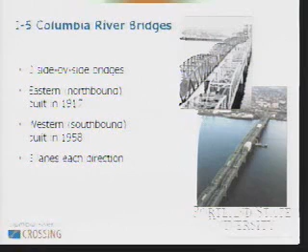And the western or southbound bridge was completed in 1958. The existing northbound bridge at that point was then reconstructed to raise the profile a little bit to match the new southbound bridge. And tolls went on in 1960, and they were taken off again in 1966. The tolls at that time were 20 cents for a vehicle and up to 60 cents for a truck. 3 lanes in each direction now.

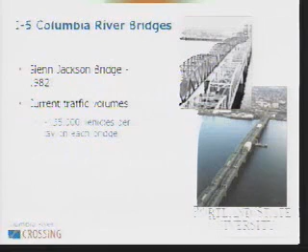The next major crossing of the river was the Glenn Jackson Bridge, completed in 1982. You start to see a pattern that about every 30 years or so, there's been the need to push for another major investment in river crossing capacity. We're on that 30-year mark now. We're looking at trying to have the improvements to I-5 under construction by the year 2012, so it's almost exactly on that 30-year cycle. Current traffic volumes are roughly 135,000 vehicles on each bridge. By 2020, which is our current forecast, the I-5 bridges are projected to be carrying about 180,000 vehicles per day.

Over the years, there have been a number of studies. In fact, starting shortly after the Glenn Jackson Bridge was completed, a number of studies have identified the need to do something to improve I-5. The most recent one and the most comprehensive was the I-5 Transportation and Trade Partnership Strategic Plan, which was completed in 2002. It had wide-ranging recommendations, from demand management techniques that the region ought to be incorporating to a bunch of other things, but relative to the project, there were four specific recommendations.

One was that we ought to be providing for high-capacity transit between Portland and Clark County. In particular, that study recommended that it should be light rail, and I'll come back to that in a bit. They also recommended 3 specific highway improvements to I-5.

The first was to widen 99th Street to I-205 to 3 lanes in each direction. WashDOT has moved forward with that, and it'll be completed probably at the end of this year. The second project was to improve the Delta Park section of I-5, which, as you know, drops from 3 lanes to 2 southbound and northbound. Right now there are 3 lanes, but there are no shoulders in that section. That one, ODOT is just now completing the environmental assessment, and they anticipate the construction will start in 2008.

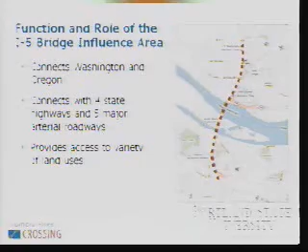Function and role. I-5 is not up here, but I-5 is the only through interstate route between Canada and Mexico on the west coast. That's a critical function for freight movement. Obviously, it connects Washington and Oregon. In this 5-mile section that's shown here in the dashed line, there are, as I mentioned, a total of 8 interchanges. That includes connections with 4 state highways as well as 5 major arterial roadways.

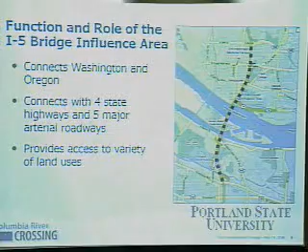It provides access to a variety of land uses. You've got the city center for downtown Vancouver. You've got a regional shopping center on Hayden Island and residential activity there. Of course, your industrial properties in the Columbia Corridor for the Port of Portland, as well as other major shippers in that area. And the result of that is that you see some very interesting travel patterns.

We did last fall a license plate video detection survey that captured all the vehicles entering and exiting on every entry and exit point in that 5-mile section of freeway. One of the things that came out was some pretty dramatic information about how people are using the bridge.

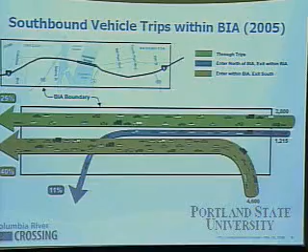Of the morning southbound trips in the AM peak, about 25% of those trips are entering the bridge influence area, I'll probably use BIA as an acronym, from north of SR 500 and proceeding through to south of Columbia Boulevard on I-5. So 1/4 are through trips as we define them for the project area. About 11% are trips that come in from the north and then get off in Oregon, but short of going through to Columbia Boulevard. About 40% are trips that enter primarily on SR 500 and SR 14 and head south. So that's your major commuter flow.

And then finally, there's about 1/4 of all trips that actually get on within that 2-mile stretch north of the freeway and then get off before you get to Columbia Boulevard. So of the traffic that's crossing the river in the morning, only about 1/4 of it is actually extending through the whole length of the corridor.

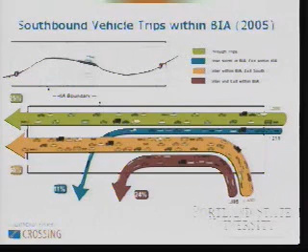We have the similar pattern northbound. I won't go through all the numbers, but the result is very similar. You see that it's about 1/3 or 32% of the trips that are actually going all the way through, and nearly 40%, 38% are getting on and off.

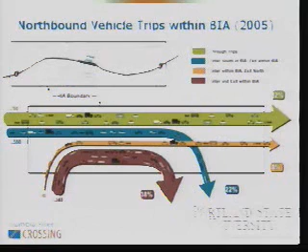An important point to note is while a good substantial number of the trips are getting on and off in that short segment of freeway, that doesn't mean that they're short trips. From the modeling work that was done in 2002, the average trip distance for the trips crossing the river was about 16 miles. So what it means is that with only 2 bridges connecting the Vancouver and Portland metropolitan areas, there's a lot of people that are traveling substantial distances in order to cross the river.

Let's talk about the need for the project, and it's broken into several categories. These are all taken directly from the formal purpose and need. Most of you, I'm sure, are aware that under the National Environmental Policy Act, one of the first things you have to identify is a formal purpose and need for the project. It was adopted early this year, and it had several categories.

The first being, no great surprise here, that travel demand exceeds capacity. And it exceeds it for a number of hours per day, which I'll show you some graphics of in a little bit. Transit service has no alternative but to put up with the same congestion that all the other travel modes across the river do as well. We have impaired mobility for freight traffic, not only traveling through the area, but in access to the Port of Vancouver, Port of Portland, and other major freight centers. I'll talk a little bit more about crash rates.

They're too high. They're significantly higher than averages. If you've ever tried to cross the bridge as a pedestrian or a bicyclist, you know that the facilities are poor and access to them is very inadequate.

And finally, both Oregon and Washington have defined I-5 as a lifeline corridor, which means that they want it to essentially be operable soon after an earthquake or a major disaster takes place. These are old bridges. As I said, the newest one was built in 1958, and they were not designed to meet modern seismic standards. So part of our problem definition is identifying that and looking for alternatives to address it.

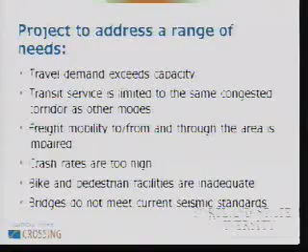So, pretty basic. Travel demand exceeds capacity. I'm not going to spend a lot of time there because I'm going to show you some graphics of that. Here's a plot of the northbound volumes, which would be the PM 1-hour volume. This is from midnight to midnight. Northbound volumes. Okay, here we go.

You can see that the demand in the blue line here gets up to about 6,000 vehicles in the afternoon. This gray bar that is illustrated here is approximately what we're finding by empirical evidence is the maximum that you can get across the bridge. A typical lane capacity would be more than 2,000 vehicles per hour per lane. But what we're finding, because of the configuration of the bridge with the ramps immediately north and south in both directions, is that the actual capacity that you can get across the bridge is somewhere around 5,400 vehicles. So you can see that the demand that we calculated or observed from that license plate survey actually exceeds what you can physically get across the bridge.

What does that mean? It means that there's a time shift for some of the travel that's trying to use the bridge. Folks are entering it and they're getting caught in queues on the ramps, getting caught on the south end of the bridge in this case, and they're having to wait in order to pass across the bridge. What that results in is right now, on average, we're seeing about a 4-hour congestion period every single day in the northbound.

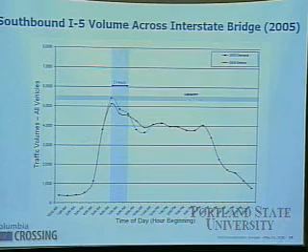Quickly looking at the southbound one, you see the same pattern. Some diversion, but mostly at this point it's still just a matter of backing it up. We're about 2 hours on average in the morning when you see delays and backups that frequently occur for a mile or two or more south of the bridge or north of the bridge.

Now, if you look at the forecast for 2020, we again show the blue line as the projected volumes, which get closer to 7,000 vehicles. With the same capacity on the system, you can see that there's a substantial curtailing of that peak because you simply can't get more traffic across the river. That means that you're going to see some time shifting, both to earlier periods in the afternoon and later periods in the afternoon. And what that results in is what we're estimating is somewhere around a 9 to 10 hour period of congestion every day, with the afternoon rush hour starting about 11 o'clock in the morning.

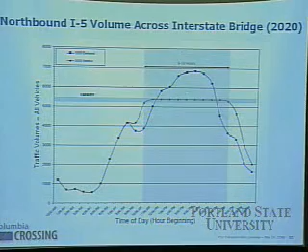Yes, sir. Is the problem, you say, that the bridges aren't wide? Is it the congestion before the bridges, or if it didn't have congestion before the bridges, would the 3 lanes of the bridge give you more capacity?

The question is, is it the bridge that's the problem, or is it the congestion somewhere else in the system? Right now, southbound, the single largest issue is the Delta Park section where it drops to 2 lanes. With the addition of the 3rd lane on that part of it, the bridge will become the most significant bottleneck. Northbound, it is the bridge, in fact, that's frequently causing queuing all the way back to I-405 and even down to I-84 and further south.

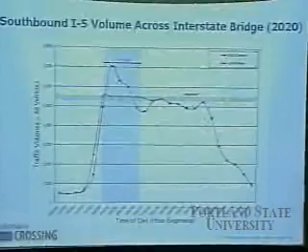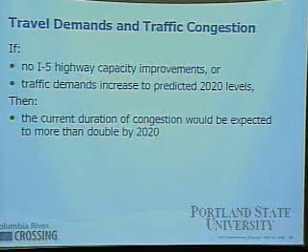And the same thing in the morning. If you look at the year 2020, our 2 hours is projected to go to 4.5 hours. So you're now up to 13 or 14 hours of congestion per day. And just a brief summary of that, if we don't do anything to the highway system and travel demands continue to increase as we're forecasting them, then our 6 hours plus per day now is going to go to 13 or 14 hours by the time we get to 2020.

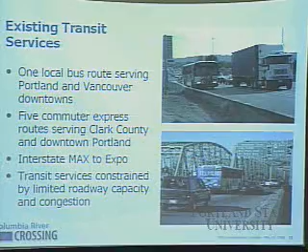Let's talk a little bit about existing transit service. We have a combination of local bus service provided by TriMet, which has route number 6, which goes over to the Vancouver Transit Center in downtown Vancouver, and then 5 commuter express routes serving Clark County and linking them to downtown Portland. Of course, just south of the river at the Expo Center, we have the northern terminus for the Yellow Line, Interstate MAX. Getting across the river, as I mentioned earlier, right now there's no way to do that as a transit rider other than to put up with the same congestion that everyone else is dealing with.

One of the results of that as you look to the future is, this again comes from the partnership study that I mentioned, which was completed in 2002, that the travel times from downtown Vancouver to downtown Portland, and this is PM peak hour, I believe, will go from about 27 minutes on average to over 55.

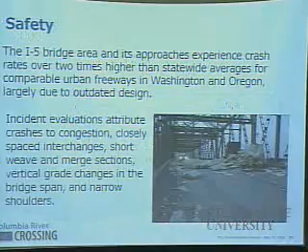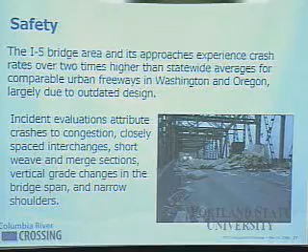There's a number of issues dealing with safety. We have looked at statistical analysis for the safety data for 2000 through 2004, compiled by both Washington DOT and the Oregon DOT. And I'll get into some of the statistics, but essentially we've been able to identify that the safety issues are significant, that they're caused by congestion, by the close proximity of the interchanges. I'll just stop there for a second.

The minimum federal standard for urban area interchanges is about 1 mile, and they prefer 2 miles between interchanges on an interstate system. With 8 interchanges in that 5-mile section, and if you take out the bridge from that, the average spacing between the interchanges is less than 1/2 mile apart. So the weaving issues and the short ramps, the accel lanes and decel lanes are a significant issue in the corridor, and you see that in the accident history.

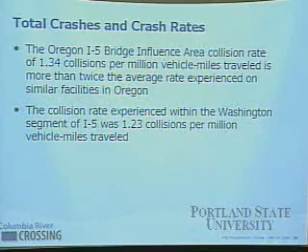By analysis, the 5-year period that we looked at in Oregon, 1.34 collisions per million vehicle miles is twice the average for comparable urban freeways in Oregon, so that would be looking at the rest of I-5 south of the bridge influence area and I-84 and, of course, the Sunset Highway and 217. The collision rate in Washington is similar. It's about 1.23 collisions per million vehicle miles. Interestingly, Washington doesn't have that same sort of normative standard that we can compare and say whether it's higher or lower than their standard.

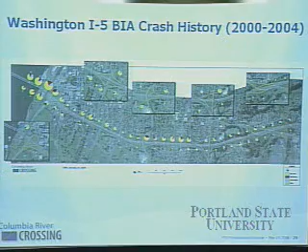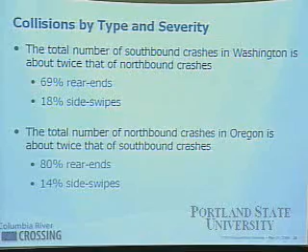So this just summarizes a little bit about what I said. Most of the accidents are rear ends. You can see that by the scatter diagrams. The next most common type is side swipes, and that occurs for both Oregon and Washington. And note that as you approach the bridge in both directions.

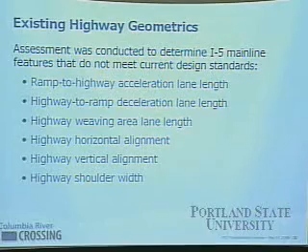Another thing that we did was to try to correlate the location of the accidents with the substandard design features. And I was corrected. I shouldn't say substandard. I should say design features that no longer meet current standards, because they were designed, of course, to standard in 1917 or 1958 when they were built. So a number of different types of geometric issues that we looked at: the ramp-to-highway acceleration and highway-to-ramp deceleration, weaving areas, horizontal and vertical alignment, and shoulder widths.

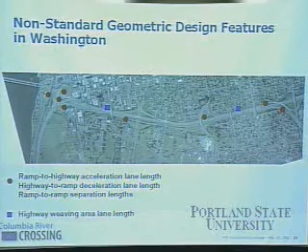And just a graphic illustrating, again, the Washington side, the acceleration length where it does not meet, and deceleration where it doesn't meet standards, the weaving area issues where they do not meet standards, and horizontal alignment issues occurring mainly at the bridge, on the bridgehead on the Washington side. And finally, areas where we have substandard shoulders.

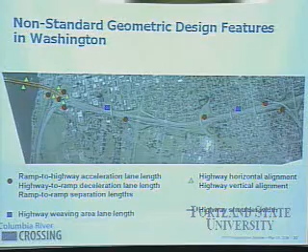And on the Washington side, it's almost exclusively related to the bridge structures. On the Oregon side, the same kind of information. The accel and decel issues show up here. Weaving areas occur in several locations. Horizontal alignments and vertical alignment issues.

One of the more challenging facts of life is that when they rebuilt the bridges in the late 50s and early 60s, in order to try to minimize the number of bridge lifts, they created a hump or a high spot in the bridges that are further south from the lift span to allow for most of the marine tug and barge operators to go through.

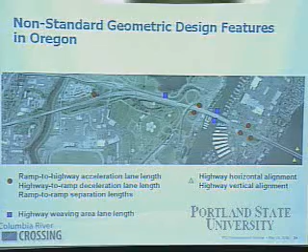In doing that, they decreased the speed profile for the hump and actually brought it down to a stopping sight distance of about 35 miles an hour on the bridge. So fortunately, most of the time the bridge is congested and people are traveling that speed. So just carrying this on, there are virtually no segments on the Oregon side where we have standard shoulders.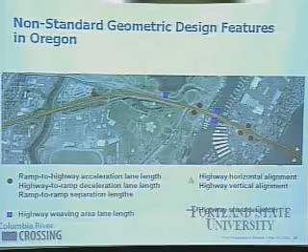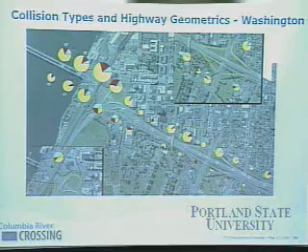Now the next thing you do is take a look at how that correlates with the accident history, and I won't dwell on that, but here's the picture of the Washington side again, and then you overlay that, and you see there's pretty much a one-to-one where you start to see the design deficiencies, and the same thing on the Oregon side.

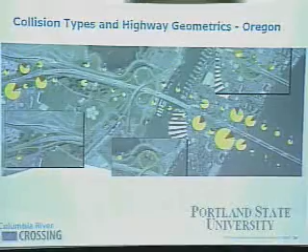Another thing that we identified in looking at the accident histories was we did a correlation between the time of day of the accidents, both northbound and southbound, and the bridge lifts themselves. So we got the bridge tender logs and actually identified particular days and particular times that bridges were lifted, and then correlated that with the accident histories before and after.

And what we found was a very striking correlation that there's about a 3 times higher likelihood of an accident northbound immediately following a bridge lift. What does that mean? It means that people are having to stop and are not paying attention, and they're rear-ending. And the same thing, but even more extreme on the southbound side, 4 times more likelihood of an accident after bridge lift on the Washington side.

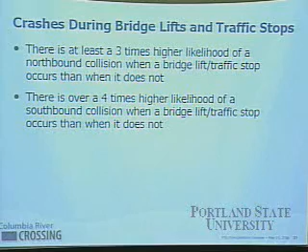Why the difference? We think the difference is that there's actually an S curve approaching the bridge on the Washington side as you're heading southbound, so you don't have the same horizontal sight distances that you do northbound on the bridge.

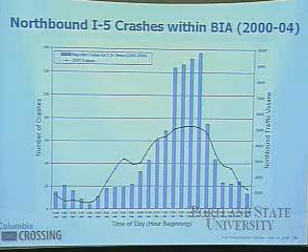Finally, there's a strong correlation on the safety data between the time of day and accidents and congestion. Here's our travel volume plot, again, midnight to midnight, and northbound showing the frequency of crashes by hour sector. So you see that the pattern pretty generally follows, but then your frequency of accidents just about doubles relative to the change in traffic volume. So most of your accidents are happening in the congested period of the day.

And if you do some statistical forecasting and look that out to 2020, you can see that you'd have a much larger period of the day with a much higher rate of accidents occurring if we don't do anything to fix the bridges.

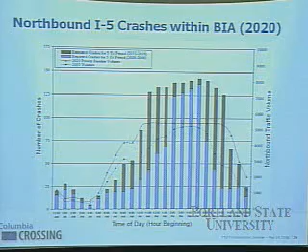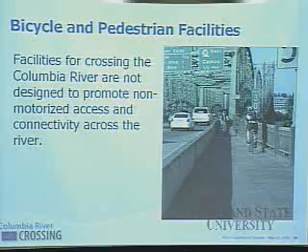Next topic that we identified as a problem, the existing bridges have sidewalks on both outsides of the bridges. However, they range in width between 3 and 6 feet, and they're only separated from the travel lanes by just the Jersey barrier and another foot or two of clearance. So it's not a desirable or pleasant experience, and it's far substandard in terms of meeting width standards. That 3 to 6 compares with what we're looking at in terms of desirable for both ODOT and WSDOT standards of about 14 feet.

Finally, I mentioned the seismic issues. We're currently doing a study to look at whether the bridges can even be upgraded to meet current seismic standards. It's far from certain that that's even a potential, which is going to have implications for the study because we have identified fixing that problem as a major part of what we're trying to address.

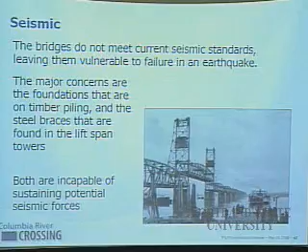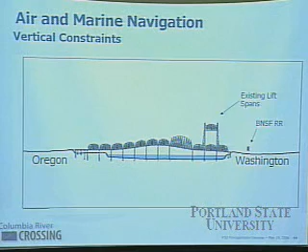One of the issues that we have to address is that immediately east of the I-5 corridor, they have a general aviation air park in Vancouver. It's Pearson Air Park. It's a historic facility. It's the only general aviation air park, I believe, that's operating in Clark County right now. We have been told in pretty certain terms that we can't think about relocating it and that we have to

work around it. So what we have as a constraint is that we have to stay under the approach slope for the approaching and departing planes as they cross over the top of I-5. You'll notice that the existing towers are in that approach slope, and when we talked to FAA about can we grandfather this in, they said no, the towers actually existed before there was an FAA, so we don't get any points for that.

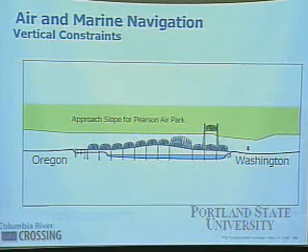The next challenge that we're trying to address is that right now there's the 2 lift spans. Each bridge has a lift span. It's on the North Shore, as I mentioned. We would love to find a way to build a bridge that doesn't have a lift span. In order to do that, you've got to be approximately in the range of about 100 feet, 110 feet off of the water. If you do that, you can see what happens. We are down to a very, very teeny window where we can actually try to snake a bridge through.

And we're working with both the Coast Guard and Federal Aviation Administration to see if we can't get a little wiggle room in those green and yellow zones. But the good news is if it was only one federal agency and they didn't have the other constraint facing them, they probably wouldn't be very flexible. But what we're hearing from both the Coast Guard and the Federal Aviation Administration is they recognize how tight this is and they're trying to work with us.

So then you overlay some profiles of potential bridge alignments on there. The lower one is about what we would do for a low-span movable bridge. It would still be higher than the existing bridges, would lift less often, but we would still require a movable span because, as you can see, we're not above the green zone for marine traffic. Note that on the north end, even the low alignment would take you over the top of the railroad. So now the touchdown point, or the way it's going to come down into Vancouver, is going to change significantly.

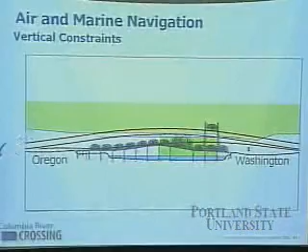Finally, this top line is one that we started off the conversation with the Federal Aviation Administration, or no, excuse me, the Coast Guard, because they said, well, we've got the Glenn Jackson Bridge upstream. It has about 144 feet off the water. Why don't you at least consider that? That way we know that we wouldn't be constraining the marine users any more than they're already constrained.

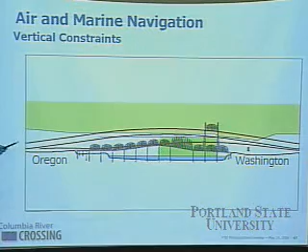They have since, based on a marine traffic survey, agreed with us that that would be extreme and that we don't need to go to that height because virtually none of the river users are using vessels that would require that kind of elevation. Plus, with the intrusion into the airspace for Pearson Air Park, we have essentially removed this high alignment from consideration.

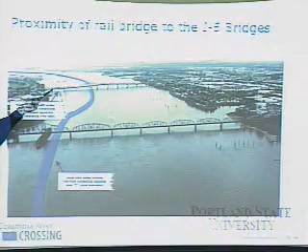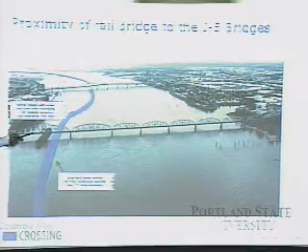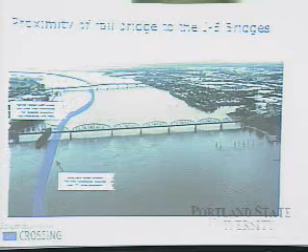Another challenge for us is that the highway bridges here, this is again the Vancouver shore and Hayden Island on the other side, are separated by only about a mile from the Burlington Northern Bridge, which is downstream. It also has its opening on the North Shore. And as I mentioned, when the bridges were rebuilt in the late 50s and early 60s and the hump was created, that was intended so that most of the commercial traffic could use that center span. What it forces them to do, though, is to make a kind of an S-curve as they go through this.

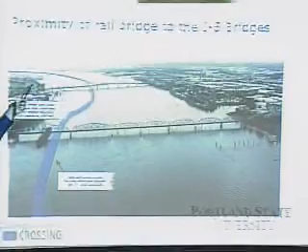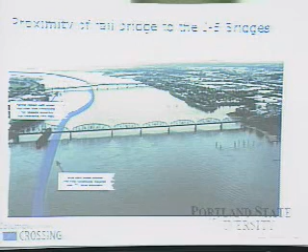And in times of high water or rapid flow, the tug operators will choose not to try to use that or even can't use it if the water is high enough, and instead will wait for an opportunity to pass through the lift span. And the reason I said wait is that by agreement with the Coast Guard, traditionally bridges have to respond to a call for clearance 24 hours a day.

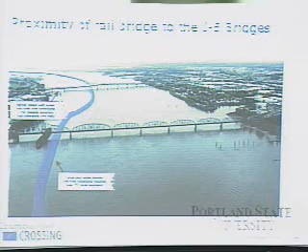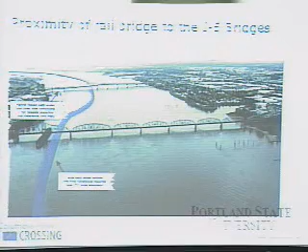But because this is an interstate, the Coast Guard has agreed to allow non-opening periods of between 6:30 and 9 in the morning and 2:30 and 6 at night. So there are several hours a day where vessels cannot call for a lift during the weekday. So if you're carrying a cargo down, you'll have to tie up and wait if the water is high or fast moving.

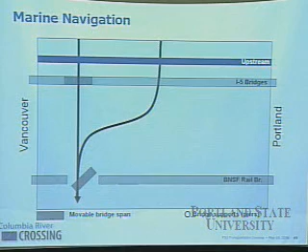Just this in schematic, one of the challenges that it creates for us: there's the straight through shot, there's your S-curve. If you start thinking about building a bridge to supplement the existing bridges, in other words, we want to keep the existing bridge or bridges in place. We want to build something next to it to also have it function to carry traffic or transit across the river. You're either going to do that upstream or downstream.

The Coast Guard has said they're unhappy with the number of hazards to navigation that already exist in the river based on the river piers, and that they're going to look very carefully at our pier placement if we try to do this. So one of the challenges that we're looking at is, can we actually put the piers in a way upstream or downstream that will allow the most cumbersome vessels out there, the tug and barge operators, to be able to navigate through without further impeding their S-curve. And we're not certain that we're going to be able to do that. That could be a fatal flaw

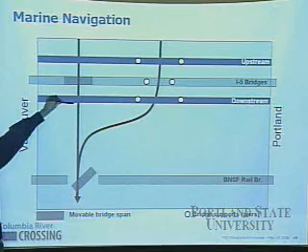more for this one, the downstream supplemental bridge, than the upstream one, because you can set your piers on the upstream side to line up so that people can pass through pretty much on the S-curve they are now, but the more you tighten the distance between the last obstacle here and here, the more you make it difficult for the tug operators to get through.

Yes, sir? Several years ago, there was talk of rebuilding the railroad bridge, doing something. Is that a possibility? Well, it certainly can be rebuilt. If you rebuilt it, would you put the channel somewhere else in that railroad bridge?

The railroad bridge, just a little bit of background: about 4 years ago, an application was made for Truman Hobbs funding, which is a federal program for reconstruction of bridges that have a safety problem. It wasn't approved by the Coast Guard. It would have done exactly what was just suggested there, move the lift span for the railroad bridge further out into the middle. That would have diminished the S-curve required and would have improved the safety for the tug and barge operators.

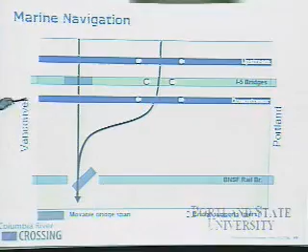The way we're dealing with that is we're starting to look at alternatives, and if we find something that's attractive in terms of one of these combinations, but only would work if you have to move the span, then we would include the movement of that span as part of that project description, and it would be factored into the cost and environmental impacts of that.

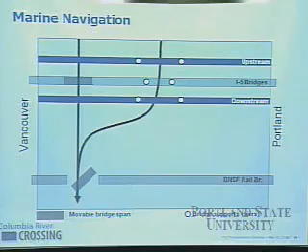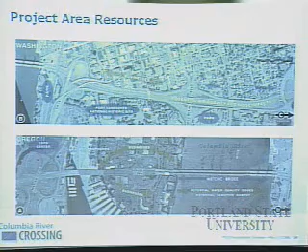So I wanted to touch briefly on some of the other design issues. Of course, we talked about addressing the Coast Guard and the marine and the aviation issues. We're recognizing that we're talking about a major reconstruction of a freeway in an urban area. Immediately east of the freeway in Vancouver is the Fort Vancouver Historic Site. For those of you familiar with the EIS process, those are all 4F properties, and we're working under the supposition that we can't touch them.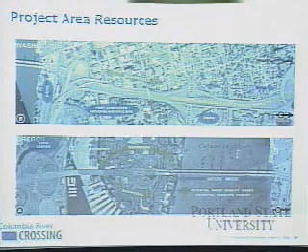There's another park here, businesses and historic buildings on the west side of Vancouver, businesses and residences and neighborhoods on Hayden Island. We're working closely with the floating home associations here in particular, who are concerned about impacts to their community. And of course you've got wetlands and the Delta Park recreational area here. So it's a very constrained project area, and while we're using the term threading the needle to find that sweet spot vertically, essentially we're threading the needle horizontally as well.

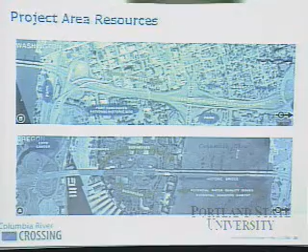Jim? That brings me to a question that I had earlier when you were talking about the crash statistics and trying to fix those half-mile distances between interchanges. Those interchanges are still going to be there primarily. How are you going to design approaches on both sides that still maintain access to those roads?

That's a good question. In general, we are assuming that the interchanges are going to be there, although there are a couple of places where we're interested in talking with the City of Vancouver and the City of Portland about whether changes in access would be consistent with what their transportation plans are. But the details of addressing a bad weaving section, the technical solutions, I'm going to start waving my arms here, but essentially you start figuring out how you can get people on and get people off without having them cross. So you separate them vertically.

You braid the ramps, or you start combining ramps, so that the Terwilliger interchange here, just south of here, is a good example of a collector-distributor type system where an on-ramp blends with an off-ramp before they split. So there are different design techniques that you can use to try to avoid conflict areas on the freeway, or if nothing else, at least have them occur in a slower speed section of the roadway.

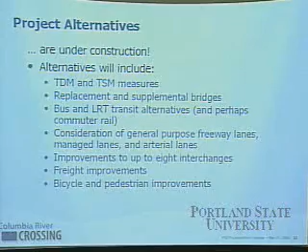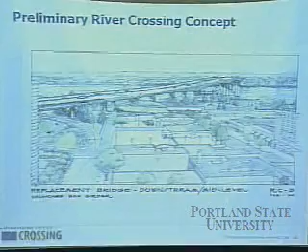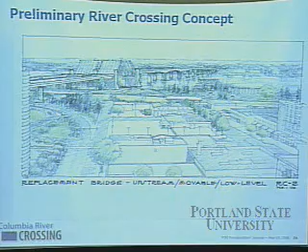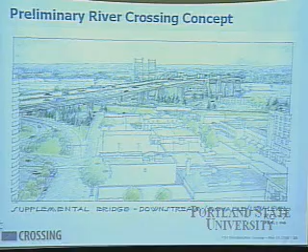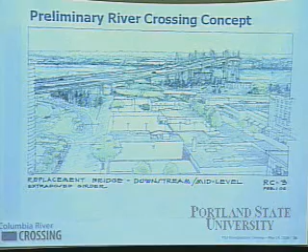Briefly, process and schedule. This is a little bit of a Noah's Ark of agencies. It seems like everywhere we touch one, we have to have two. Because this is a transit and a highway project, we have two federal leads. We have FTA and FHWA. We have the two DOTs.

In terms of regional partners, we have the two DOTs who are the lead local agencies, but we also have two cities, two transit districts, and two MPOs that are actively participating as partners in the project. And to a lesser extent, we also have two counties and two port districts that are actively involved. So just in those top two groups, there's 14 federal, state, and local agencies that are working on the project.

We have done something as a first in the country. Actually, there's several firsts in the country. While the project is one of about 20 or 25 projects that FHWA is tracking that are over $1 billion, it's a much smaller number when you think about those that are bi-state. And when you get down to a bi-state multimodal one, we believe it's the only one in the country that meets all that criteria that we're working on right now.

Along with that, we have created the first in the nation streamlining agreement for the environmental review and permitting. It's involving all the state and federal agencies that typically would have to sign off on an EIS or issue a permit. So we have U.S. Fish and Wildlife, the Corps of Engineers, the state agencies on both sides of the river, EPA. They have adopted as the name of their group Interstate Collaborative Environmental Process. And it is being used as a model around the country now for how to streamline the involvement of those agencies.